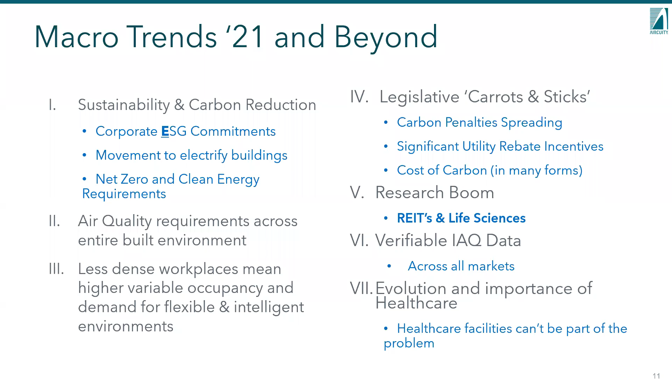Try three things usually just to try to drive the slide forward. Sorry. Anybody has... oh, there it goes. So there's a quick slide.

The macro trends driving this—obviously better workplace outcomes and the net zero requirements, plus this technology improvement and adoption—is really driving, I think, the future of the healthy and sustainable built environment. And that's really just a summation of all the stuff that we just talked about.

I'll point out that these are all in action. We are seeing activity with clients spending and allocating millions and millions of dollars to address these over the last time, and that probably wasn't the case even as much as 2 years ago. The pressure from boards and senior leadership to actually achieve this is really driving activity—people putting the money where their mouths are and really starting to implement projects.

The other point here is you're seeing really changing outdoor and indoor conditions. The outdoor environment, as we've all seen unfortunately, whether it be fires in Europe, Australia, or the West Coast—the most recent Pacific Northwest fire spreading across the entire United States—means a lot of customers we work with, 100% outside air systems, are seeing major changes in the outdoor environment and wanting to verify they're providing good indoor air conditions to their workforces and constituents. That's an important part of this as well.

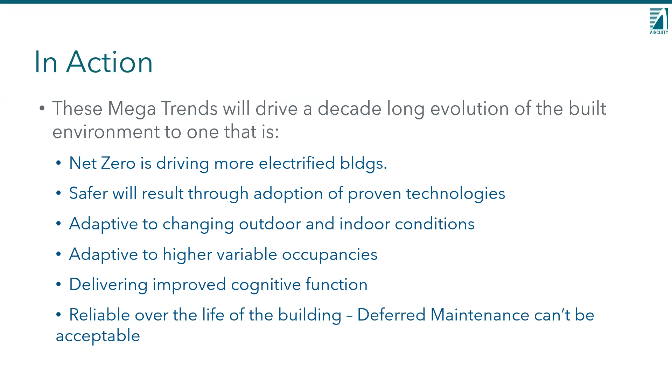This was just mentioned by Bob in the outset, and this is really important—it's actually higher than 28% if we look at the embodied carbon. So it's undoubtedly going to be a massive decade-long activity of the built environment to address carbon emissions from buildings, and we're going to see continued investment and focus on net zero buildings.

HVAC and ventilation are obviously a huge impact on this. Having a former life in lighting for almost a decade, as lighting has gotten dramatically more efficient, HVAC and ventilation now drive anywhere between 35 and 70% of total energy usage. In an office—and maybe surprising to some—70% in a lab is not uncommon.

Reheat is often the number one carbon mitigation benefit, and it's the focus of many customers we deal with. When you effectively control ventilation, you can dramatically reduce reheat, especially in higher critical environments like ORs and research spaces.

Buildings are going to need to be more dynamic. Occupancies are expected to be anywhere from 20 to 80%, all the way up to their normal operating ranges, as we're now in these hybrid work environments. We just continue to need to eliminate waste from older prescriptive and antiquated designs. I think we're going to see a lot more innovative technologies continue to address this issue.

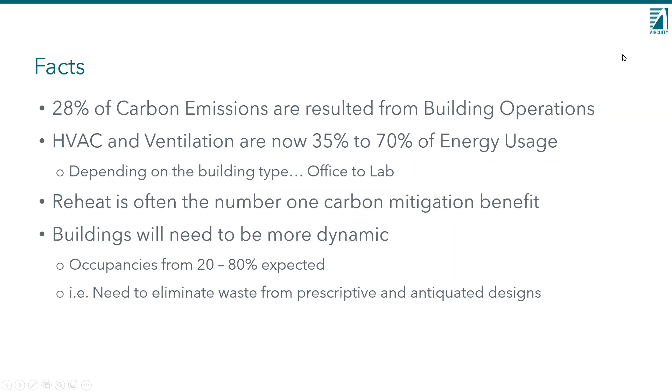This is from WSP, a consulting firm for the built environment, and these slides I'll go through pretty quickly. You're seeing a lot of convergence on net zero. In the past there have been a lot of different descriptions of that, and the terminology is starting to really sync up—the commonalities across all the definitions are starting to converge, which is great news.

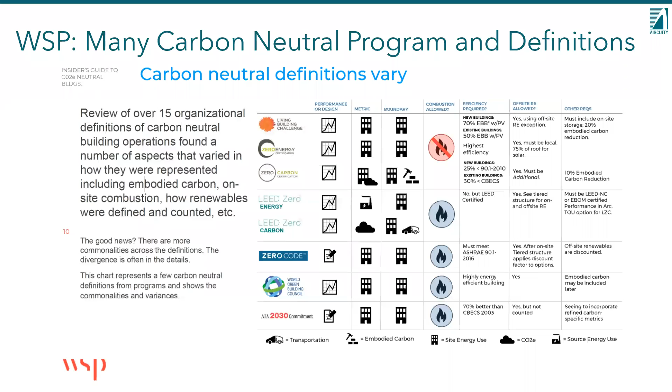What's really neat here is that it really does start with many of the groups that are involved in CABA—I'm really familiar with building technology and how buildings operate. It really starts with the efficiency of the building and some of the systems that we control and operate traditionally.

We're also seeing that it's going to involve a lot of newer disciplines that we haven't historically had as much direct involvement with, when you look at the electrification side of buildings. We're starting to see that being really brought in. I know Trane Corporation, as an example, has an electrification division really focusing on that, and there's obviously many others doing the same thing. You're really seeing a lot of focus on that.

I think this is going to be an evolution that occurs over the next decade. When you look at on and off-site renewables and the technologies there, they're going to be brought into play. Coupling that intelligence with getting buildings really efficient is a key takeaway to this presentation. You really need to make a building as efficient as possible before you try to solve the supply side. We've been involved in saving $35-40 million of offsite renewables, like solar, by making buildings dramatically more energy efficient. In this case it was a large research institution, heavily energy intensive, but the impact can be dramatic when you make buildings a lot more efficient at the outset, both existing and new.

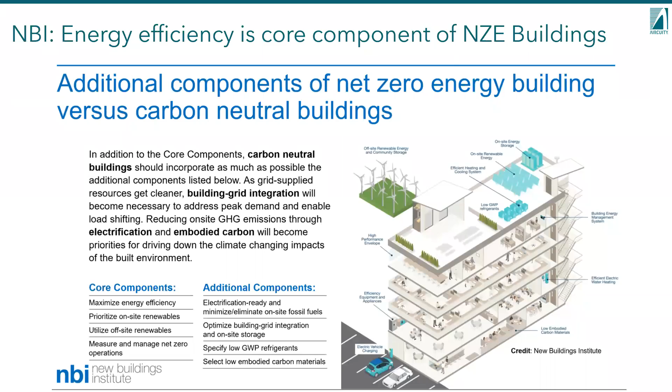We're going to say on the next slide. So the next slide.

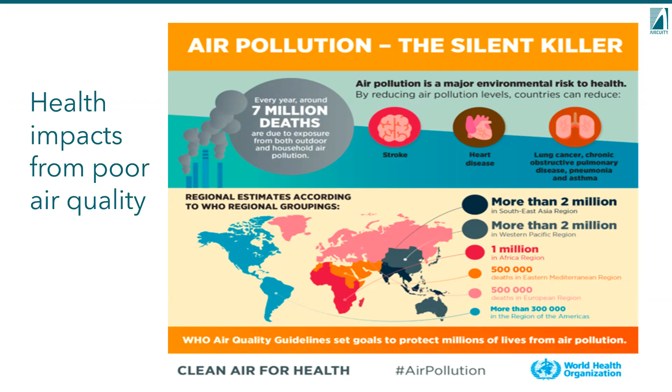The next slide talks about something I was very happy to see - really just the alignment around the targets. What does good indoor air quality look like? This is supported by the International WELL Building Institute, as well as RESET, and now the WHO - really alignment around what good indoor air quality looks like. I think that's a great convergence in the industry.

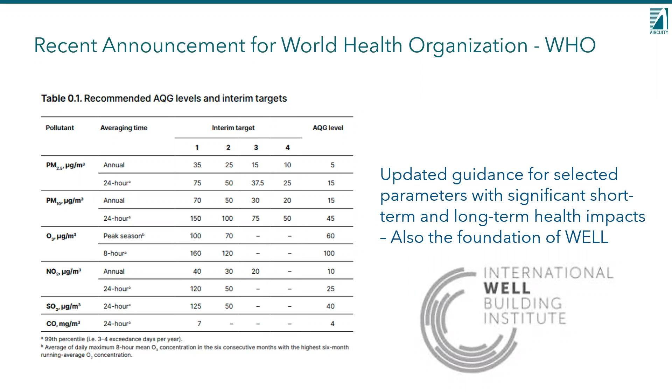So we really now know what good air quality looks like, and the cost is becoming better communicated and better understood by much higher level management and senior leadership in many organizations. The cost is now known to be real, both negative and positive - positive on the cognitive effect study, looking at the productivity and worth and the health and wellness of having good employees be healthy and well at the workplace. On the negative side, what is that costing, whether it be higher education, a life sciences organization, or even a K-12 school. In many cases we forget these are large employers as well, and this is significant. The awareness on this front has dramatically changed over the last 2 years, and now the economics can be more easily justified, and a lot more dollars can be allocated towards improving environments.

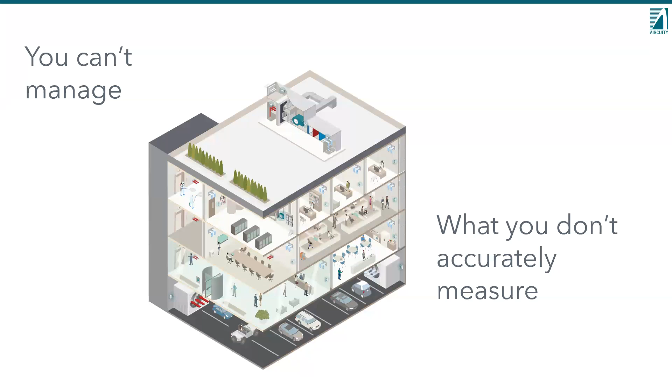This is just something we always say, but you can't manage what you don't accurately measure. It seems like common sense, but it's often forgotten in the built environment, sometimes primarily driven by budgets, or what some people call devalue engineering - value engineering exercises that sometimes forget about this. I think the good news here is that the total impact of all this is now being seen.

As building managers, we really need to understand what's coming in from the outside air, how well our systems are doing at reducing particles, as an example, from the outside air. Are other air quality mitigation strategies working, and how effectively? What was our baseline before?

As we see building cleaning practices significantly change, what impact is that having on the occupants of the building? And are we able to and willing to communicate these new air quality data insights to a much larger constituent base?

What we find at Aircuity a lot of times is surprising, having spent many years focused on facilities and building operators. When it comes to indoor air quality, there's a much broader range of constituents that are concerned and want access to that data: environmental health and safety, infection control, animal care professionals, researchers, professors, and then the general population that wants to understand, am I coming back to work and is the building healthy?

We're starting to see and be directly involved in communicating that air quality data in many varieties to a much larger constituent base. I think that's a very important dynamic and change that we're seeing occur.

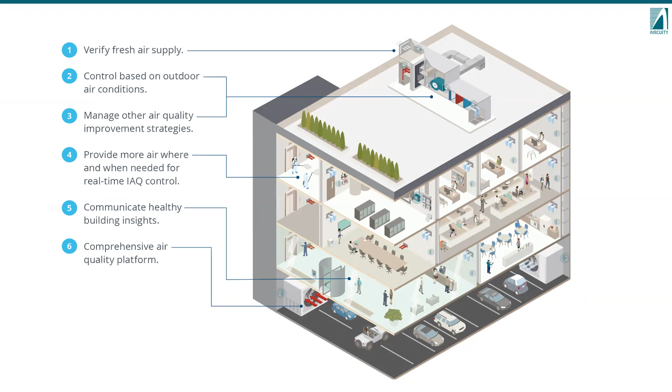So I'm going to go quickly through our platform and sum it up: what we try to do at Aircuity is provide a sustained, accurate indoor air quality measurement of all the primary concerns outlined in the previous slide.

I'm going to skip over this video, hopefully. The platform is meant to reliably and accurately measure CO, small particles, TVOCs, CO2, and communicate that to the building automation system for dynamically controlling the ventilation.

We were able to do that with a life cycle cost approach, and much more. If you look at the life cycle cost of that whole solution, it's a better life cycle cost approach for the built environment, and it avoids creating another deferred maintenance item for our customers.

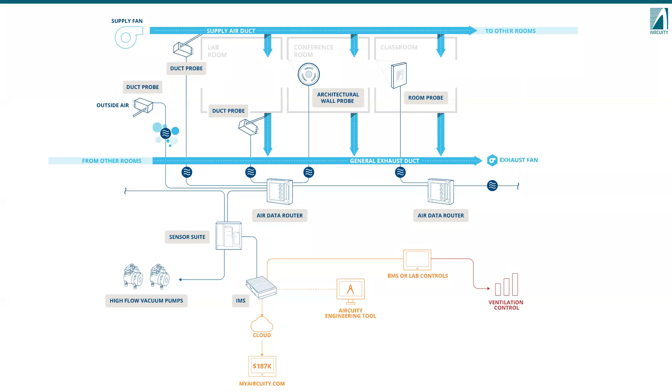So we solve that through an assurance services program, and we also take all that data to the cloud and then repurpose it back for the various constituents I mentioned previously. You can find out more on our website for Aircuity, including the detected parameters.

As I mentioned several times, particulates large and small are something that's very difficult to measure, and it's something we've been doing for over 20 years. It's becoming much more of a concern for all the reasons mentioned in the built environment.

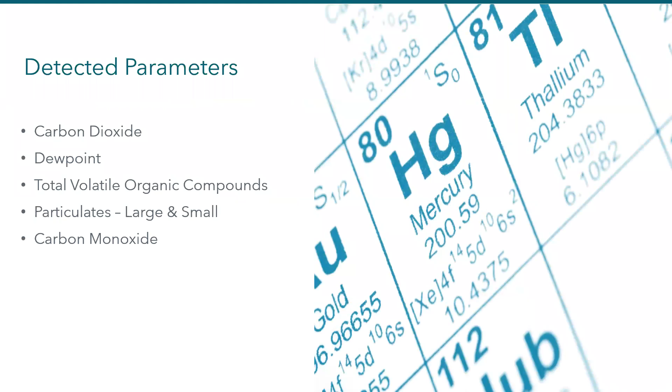I'll skip through some of these slides. That platform has been used, just for the record, in both new construction and retrofit. We do a lot more retrofit projects than new construction by number, though dollar-wise some new construction projects can be quite large. It's been a proven concept for well over 14 years now, all across the globe.

I'll just leave it to say you can learn more from our website. But truth be told, the activity we started a long time ago in critical environments has led to one of our sayings: now all environments are considered critical. When we talk to a K-12 school, higher education, or life sciences customer, they're all thinking about the same things. The concept of this presentation, about efficiency, net zero, sustainable solutions, and having a really high quality environment, is universal.

So I do believe that all of the built environment now needs to be considered critical environments in terms of health, wellness, and safety, protecting the occupants. That certainly was a lesson we learned from COVID, but challenges remain in the industry.

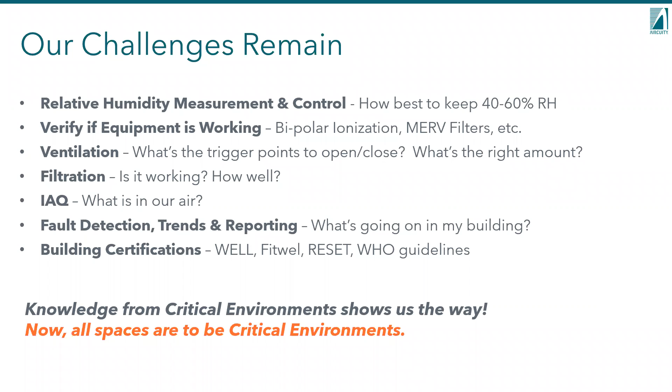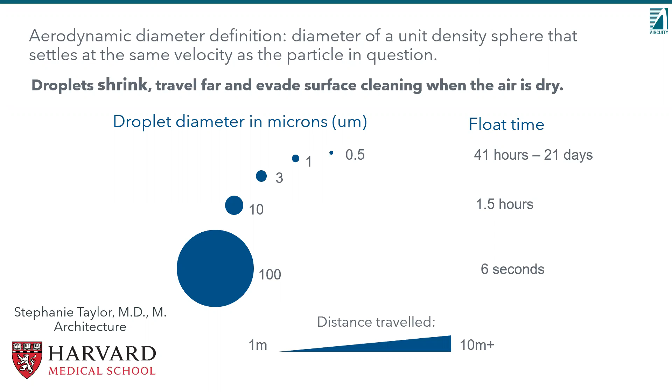This was a lesson from over the last two years that we all learned in terms of small particles, as it relates to humidity, but also to the importance of particulate control. You're seeing improved filtration, many customers going from MERV 8 up to MERV 13 or 14, and also just having an understanding of what's happening outside and what's happening inside. This directly impacts the efficacy of the indoor environment in terms of health and wellness. I think it's been clear now that this is something that should be measured and understood much more effectively than previously.

This is a slide from Stephanie Taylor. You can look there and find out a lot more if you've never seen her 40 to 60 website. You can see the impact in the ranges of 40 to 60, how much better environments are. But again, I personally know how difficult that is to do in many buildings. So what other things are customers going to be looking at during these really dry points of the season, when infection rates can be much more in the 70 to 80% range?

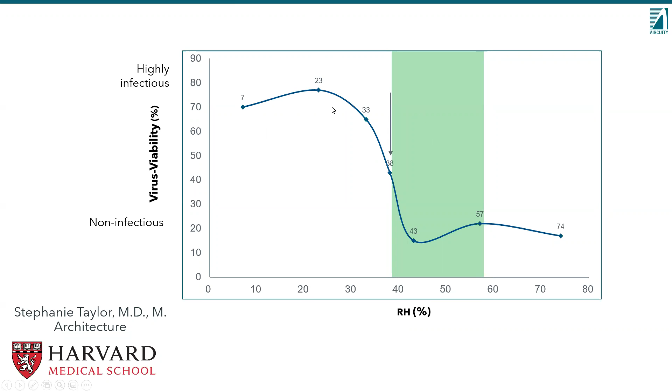Filtration effectiveness is something we've all been focused on, and we've had previous presentations on it. We're seeing universally all customers adopt to that. Sometimes this does take real hardware changes, so you can't just go from MERV 8 to a MERV 14 or 15 filter simply by switching out the filter itself. Some modifications are being done. So many times this is a really good, effective step one, phase one improvement. I'm seeing a lot of clients do this, and we're helping a lot of clients understand how impactful that was and what the impact was.

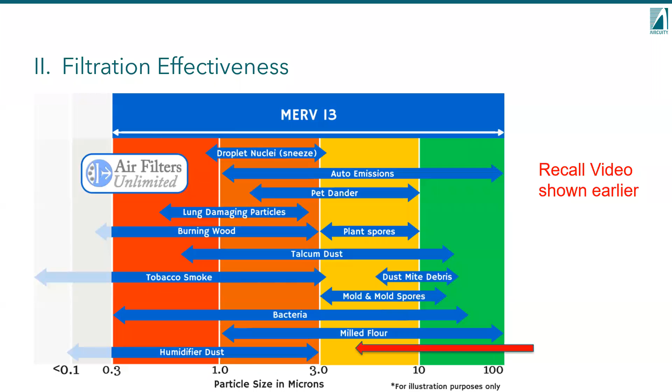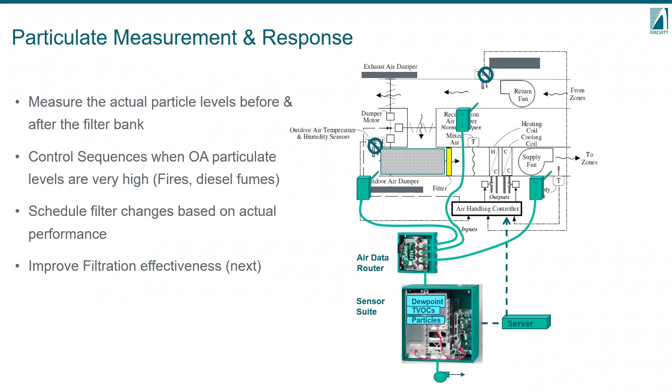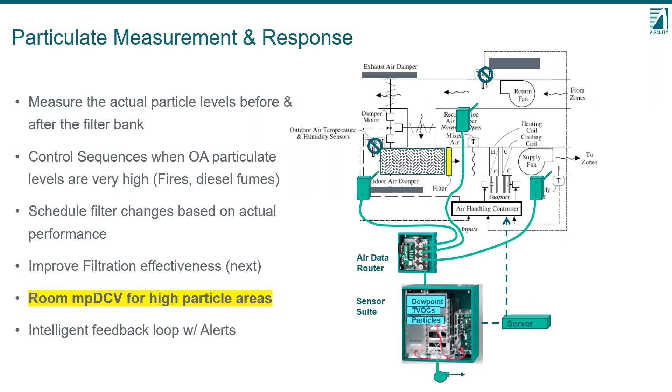I think we're going to have a slide coming up about particulate. For Memorial Sloan Kettering in New York City, and for many other healthcare organizations, we're measuring outside air, supply air, and return air, if they have return air systems, looking at particulate levels and understanding how effective whatever strategy they're implementing is, and also helping them with sequence of operation changes as a result. There have been many successful case studies there. This also goes down to the room level—where are events happening, can DCV effectively help that particular room, and what other strategies may somebody want to look at to mitigate or improve that area in the building.

So some quick case studies, and I think this is going to be a wrap, and on time. University of California, Irvine was a case study—a customer we started working with in 2007. It's a great case study for a university that took a holistic approach, starting with proving all of what they deemed the smart lab essentials would be. These are the elements of this. I'm not going to go through each one, but there's an unbelievable amount of data on their website about the smart lab. Look up UCI, University of California, Irvine Smart Lab Program—incredible information on there.

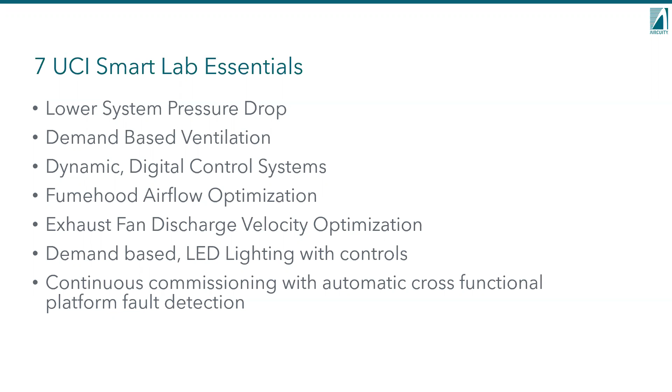I think the story here is just one that when you look at—when I say Aircuity, let's just talk about demand-based control ventilation—it really impacts the system pressure, it impacts the energy efficiency related to ventilation, it impacts many other systems, and ultimately it's massive energy and cost savings.

One of the neatest parts about the UCI story is that they now lead all UC schools with the least amount of health and safety events across their campus. They've also stated almost $100 million of total economic impact. If you look at the growth of the system, the school, and how much they would have had to increase their supply systems and cost and all sorts of other costs, they deemed that this program has saved them in the $100 million range.

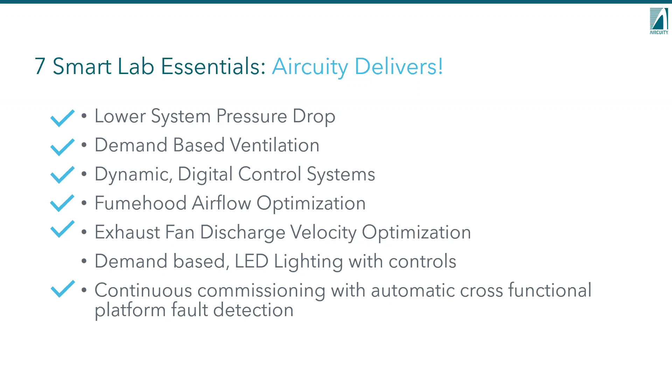They set out to reduce their energy usage on campus by 50% across 17 buildings, and they were able to actually achieve a 61% annual energy reduction, honored by the Department of Energy several times. It's just been, I would say, the beacon of higher education in terms of impact. They are now stepping up to a full net zero goal by 2025, and they're on a really good path to get there. They have since educated and trained probably over 500 other institutions on this program and strategy, and we've seen in higher ed almost 250 or so adopt the strategy in some form, or on a path to do it at a much higher rate. So, great success story there.

I think you can see this has been happening. One of the key elements of what's happening today is, do we continue to wait? Does this need to be more proven out? I think what we're witnessing now is a step change in terms of activity in the built environment, of people really taking this as seriously as they need to, finally, thankfully for all of us. Whether ESG is driving that, or whether it's the penalties that are looming, or whether it's just the cultural change of organizations saying, we know this works, we know the technology is there, we have a really good roadmap on how to do this - let's get serious and get on a path to do this.

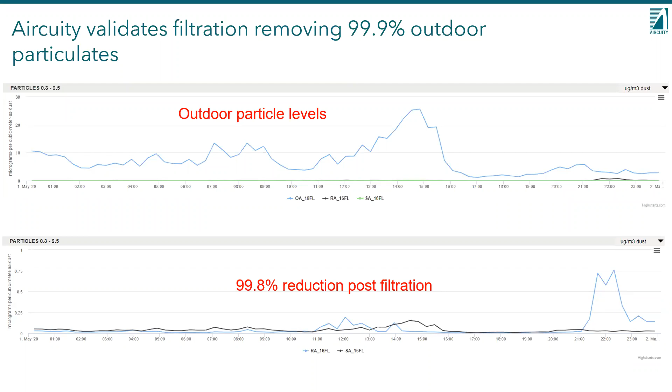We have since done this across the whole entire Memorial Sloan Kettering campus. They get lots of outside air and monitor indoor air quality parameters, constantly tracking the outdoor air particle levels and seeing how effective their filtration is actually working. If it's not, they have filter bypass - if they want to improve or upgrade filtration, they can see what effective change is actually happening. So they're using a data-driven approach. This project received an incredible economic result for the institution, and it actually resulted in almost a 2 megawatt reduction on this campus.

So when you look at going to net zero, again, the story is that these ventilation management projects can be the single best and most effective way to get there as we start to tackle HVAC use in buildings. I think oftentimes people think, okay, Apple's doing this, or Memorial Sloan Kettering's doing this - they have money. But we've worked with over 150 school districts around the country, and have probably been involved in more net zero projects around the world than anyone I know of. I'll say we're seeing a lot more of these types of projects where public institutions are driving towards net zero.

We're on our second project with the school district - the first one was net zero, and the next one's near net zero. They actually are using air quality data for all of the teachers and are also broadcasting the IEQ data publicly. So this is not just a large institutional issue - this is an everybody issue.

I think eventually it's even going to come to owner-occupied commercial real estate, like an Apple or a Google, and we're involved in those projects very often. But I will say we're even starting to see it in more real estate investment trusts, et cetera, who have multi-tenant sites, because really it's going to be demanded publicly by the people occupying those buildings.

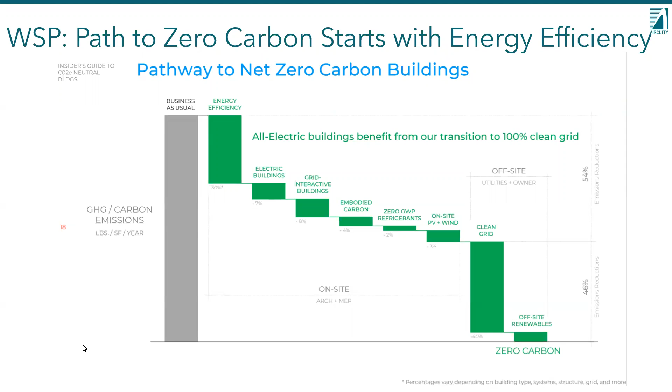So at the end of the day, for the clients we work with, we're really looking at just having them commit to their goals, start the process, assess their opportunity, and leverage the knowledge and success stories that are already out there, by talking to some of the case studies I gave already, and obviously many of the customers you guys know. So this can be done, it can be done well, and I'm really excited about the future for all of us to make this happen.

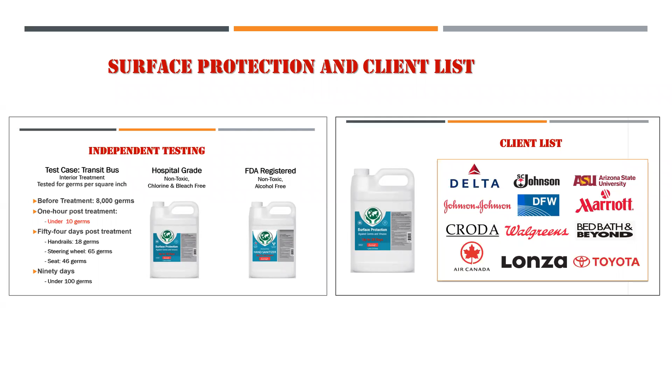The next slide will show you an explanation of how the technology works, and these are all the different germs and viruses that we can take care of utilizing our technology. The drone will also be doing the application in certain areas of the process. We'll also be using electrostatic sprayers and infrared lights and other technologies to make sure it's applied and attached to the surface, so we get full coverage of the product when applied on surfaces.

When Aircuity was talking about air quality, as we know, people are cleaning buildings today with different chemicals and disinfectants. Those things also release volatiles into the air that stay in your vapor barrier and humidity, causing the HVAC system to have to turn on more often because people are using chemicals so many times per day.

Our treatment, we put it on, and every 30 days we come back and retreat it. Since it's a water-based technology, nothing is going into your vapor barrier, so that's a way we could control some of the air quality. It's like eliminating harsh chemical use in buildings, which actually causes more sick building syndrome than anything else, besides people sneezing, coughing, and similar things.

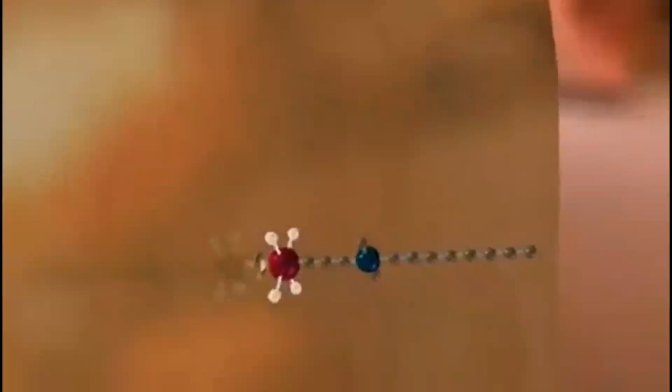Well, we could read it. Maybe you can explain the difference between cleaning surfaces with UV lights and other technologies, versus cleaning them every 30 days. UV lights just do an instant kill, but you've got to keep coming back. If somebody touches surfaces, or any volatiles in the air drop onto your surface, somebody's got to come back and use the UV light again. I've been using UV lights because the guy who owned American Ultraviolet died, and I've worked with UV lights for 20 years in Vegas, MGM Grand, and other places, but we realized UV is just a wand, or you have UV robots, that's just doing an instant kill.

I agree, I'm just trying to understand the technologies, including non-chemical water treatment. We're doing that as well. The video, you can hear, actually puts out these spears that break down viruses through layers of the technology. You can see everything we could take care of right here, because we're not just talking about coronavirus, we're talking about all the different viruses and bacteria that affect any buildings or surfaces, from hotels to schools, to any type of building, on anyone touching surfaces. We could eliminate that virus from migrating.

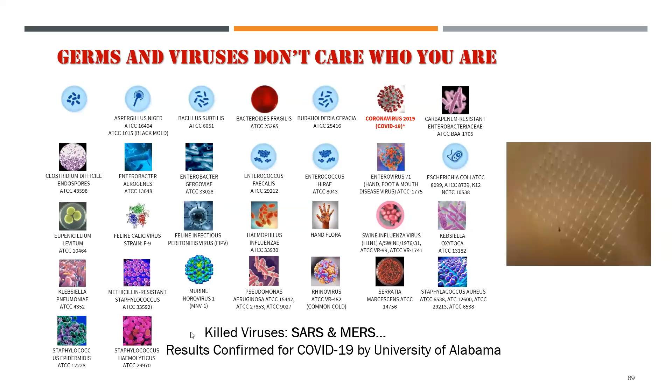Okay, so that's one of the technologies, and as Mark pointed out, this one is water-based. If you go to the next slide, you'll see a similar approach. You can see some of the clients using this in terms of this coating, and it's actually allowing you, through using light, to not only clean but purify the air. This is another chemical reaction that results from it, and this company partnered with Aircuity. You can see who's been using that in these different areas.

So also looking at, through light reaction, we're talking about both indoors and outdoors. One of the big issues outdoors is soot buildup, mold, funguses, different things that build up on the outside of the building through industrial pollution, exhaust fumes, and different things that happen in cities. So with our product, it keeps the buildings cleaner longer, but it's also an air purification system. For example, on the slide deck next to it, we did an 8,000 square meter soccer field, and when we tested the air quality of that soccer field, it was equal to 20 hectares of trees in a forest in terms of clean air quality.

So we're looking at the buildings, interior and exterior, using light reaction to create air purification, which is very important today because now it also becomes a carbon reduction building, and the building will perform better. We also do it under roofing, because roofing also, like white roofing, Title 24.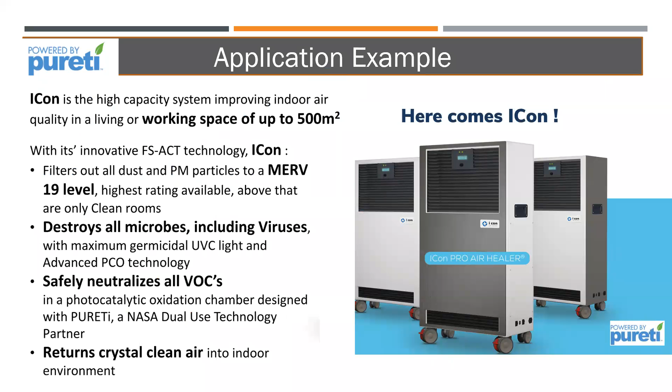You see that also manifested here in actual systems. This is a high capacity system here that's leveraging that same technology and being able to ensure the purity within the rooms, within the buildings themselves. So here you can see returning the clean air into the indoor environment -- air purification systems using this.

Sorry, Mark, you wanted to state something? No, you're perfectly fine, that's great.

Excellent. And as part of the Digital Twin Consortium -- so putting on my other hat as the CTO for the Digital Twin Consortium, who we have a liaison with CABA, to be able to identify opportunities and areas to collaborate and work on either joint white papers or programs, we have what we are now bringing out as a technology showcase to demonstrate this, working with some of our members.

One example is around using buildings as batteries to reduce the carbon footprint by using alternative resources to generate electricity, and using a digital twin to actively manage that from a perspective of load balancing and understanding different scenarios that might occur. It's not just for modeling and predicting what might happen based on historical data or event intelligence and situational awareness coming from sensors, but being able to predict the future and run what-if scenarios, with those scenarios already preset based on conditions, thresholds, and data analysis, using a digital twin to actively manage and control the systems when those thresholds are reached.